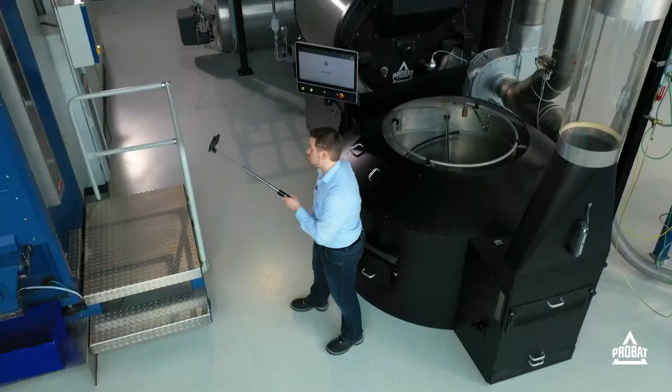How do we at PROBAT see these important topics, and what are we currently working on? Come, I'll take you with me on this journey, and first I'll visit my colleague Sebastian Fichthorn, Head of Technical Department for IT and Automation. He's waiting for me in our amazing control room, sometimes I call it our Starship Enterprise. Before I forget, you'll have the chance to ask questions during the closing Q&A session.

Okay, now the steps. Sometimes every step feels very exhausting. We hope we generate much interest with the following solutions.

So that's him, here is my colleague Sebastian. Hi Sebastian, I hope everything's well prepared and running now. Yes, thank you, everything is running. Welcome to our demo center here at PROBAT in Emmerich. My name is Sebastian and I'm head of the Software Engineering Department here at PROBAT. Today I welcome you to our demo center, our control room, where we can control the whole machinery downstairs from our pilot factory, and we can also run simulations here and do online trainings.

Today I'd like to introduce our new software solution, our Pilot 2020, which I developed over the last year together with my team. We also changed a lot hardware-wise, equipping every motor with a VFD, giving us more flexibility for recipe development and energy saving. But today we'd like to focus on the software part.

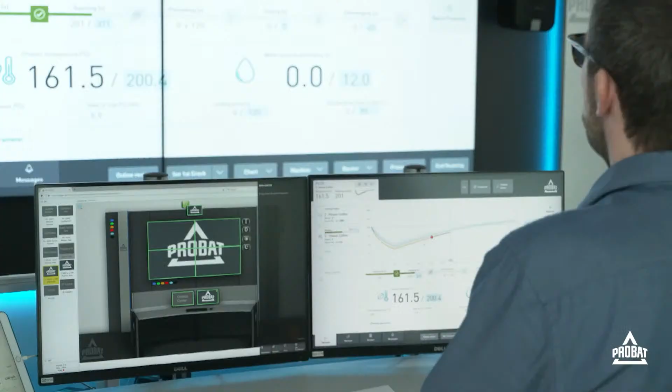So what do you see here on the screen? This is our main overview screen with all the stages. On the left you see every stage of this roaster, and in the center of the screen we have our current product curve, running against a target curve. We directly visualize if you're running out of target by a color change of this product curve. This is a simulation, so we only want to show how this looks. Below the curve we have our progress bar, showing at which stage your roast currently is, and below that we've allocated the main KPIs of your roast, like product temperature, water quenching amount, or cooling and discharging.

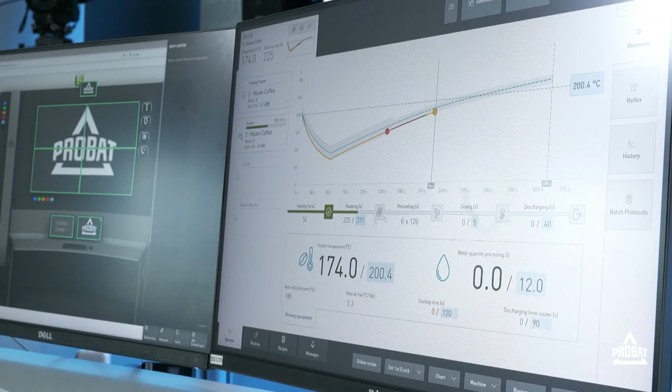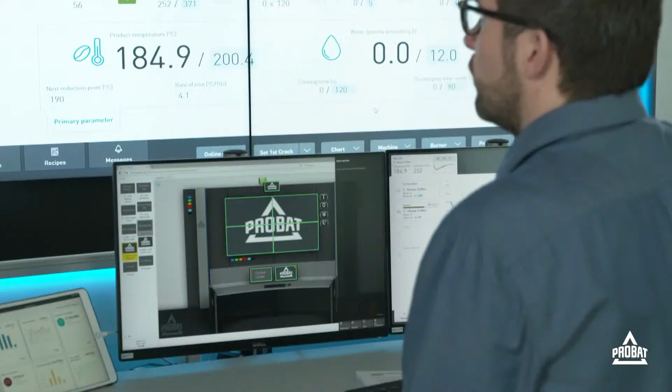You may have noticed that we don't have an alarm table displayed all the time here. Instead we have a so-called toaster which flies in from the right corner to inform you there's maybe information for you, a warning, or even an alarm. You may all know that you often have to monitor different roasters, different machines, and quite a lot of other things to do, or you might even just be enjoying a good cup of coffee, and then you need immediate attention, or your machine needs immediate attention to solve an issue.

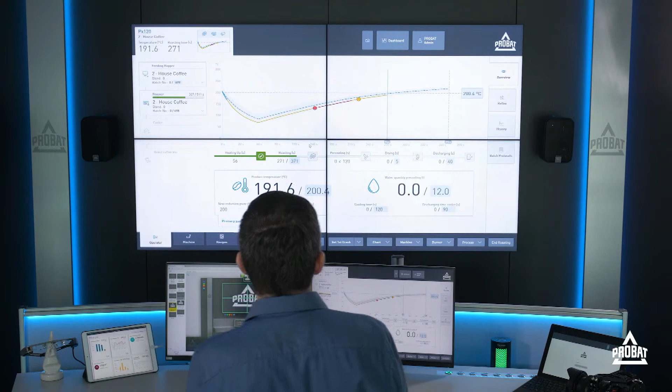Therefore, we have a solution, and we can communicate with all these kinds of modern control room equipment. I will now show you this when I'm triggering another alarm at a different machine.

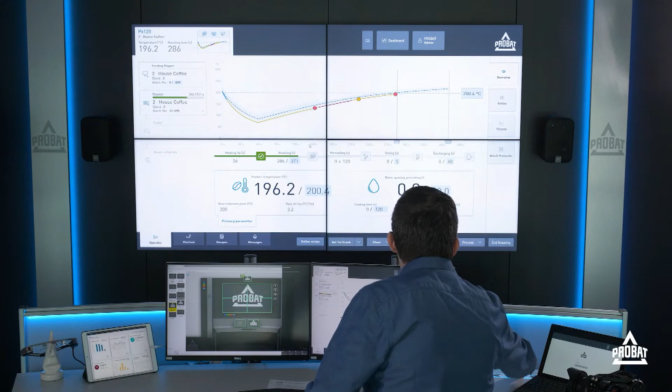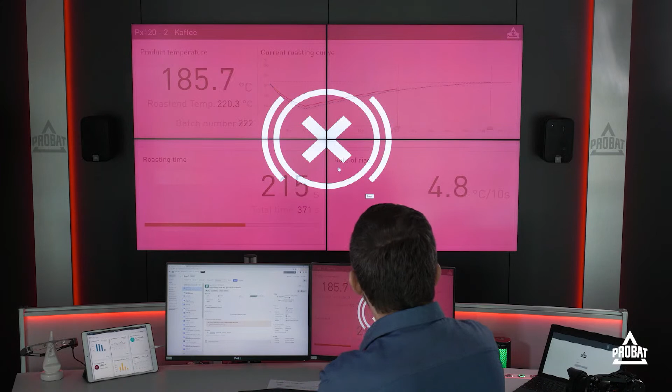What happens? You see, we switch the lights to red, and we play this sound via the speaker. Also, we change the content of the whole picture and display another machine on the big screen, as well as here below on my desk. Now I can click it and I land directly in the relevant page of our application, where I can take care of the issue.

But before I take care of this alarm, I would like to introduce our new message service and alarm management. We think it's very important to have the information you may need to solve an issue, or see how to solve it, directly at this alarm management system.

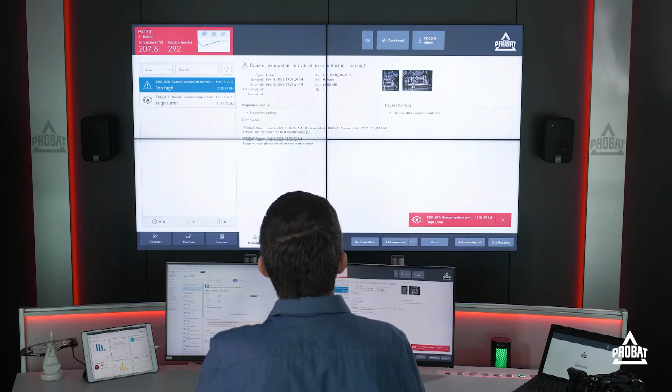Therefore you now have the possibility to attach images or little video clips or how-to videos directly to the specific alarm, and you also get a functionality to add comments for your colleagues directly to this alarm. That means if you're on the night shift and have no maintenance team available, you can leave a message for the morning shift: please, when the maintenance team arrives, check this issue, maybe change the sensor. This happens quite often. So you have some kind of knowledge base directly implemented in our new application.

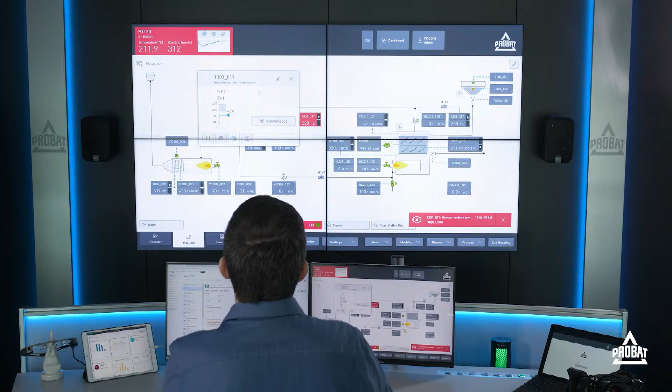But now I will take care of this alarm, and I will acknowledge this information, and I will also use this go-to-machine loop-in to acknowledge this so-called object alarm. We divide these alarms into object and process alarms, and these object alarms will always give you the loop-in to the specific and relevant device at our machine overview screen.

So you see, in between, when I solved the issue, the lights go back to the color from before, and I'm in a quiet and calm atmosphere again because the issue is solved. No immediate attention is necessary anymore, and I can do my other work again.

But before I switch back to the operator screen, because I'm now here at the machinery page, I would like to explain what you see here. Here you have an overview of the whole machine, so every piece of equipment, every sensor, every motor can be controlled via this page. We can open these faceplates, and then you get a quick overview of the condition of a motor.

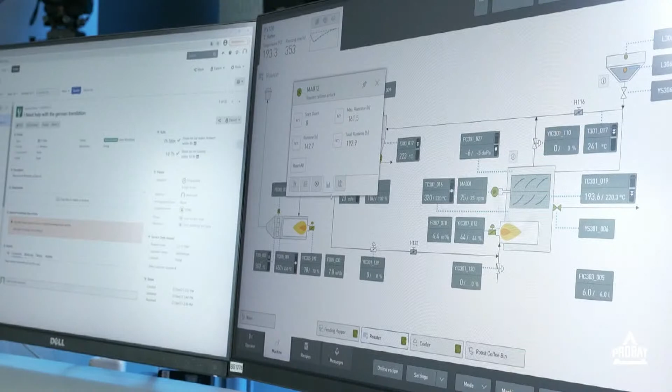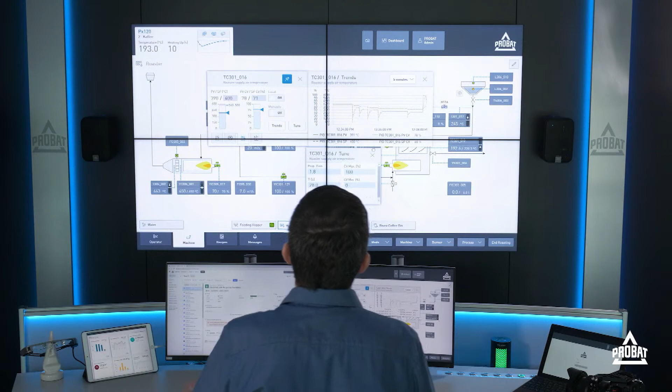For example, here some statistic data tells you how long it runs or how often it's switched on and off and so on. You can also see a graph here, up to 30 minutes, showing the last values of this motor. And if you have the authorization level, you can also tune your controllers here, get a trend of the controller, use the tune parameters, and work directly on these devices.

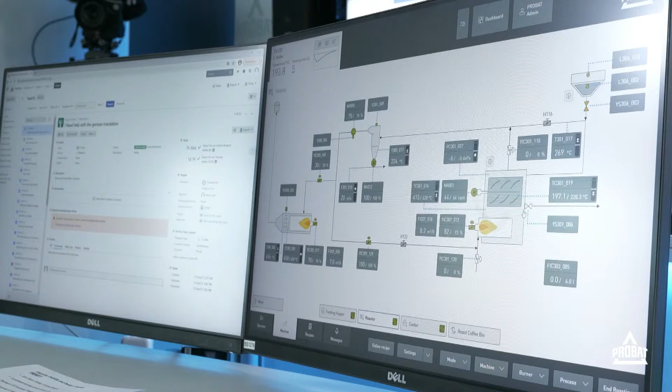Here at the bottom we also have some navigation, which means you can switch to the different locations of your roaster, because we think it's better to have less information and not such full screens, to get an overview and directly see the status of your machine. And now you see that we are just here at the coffee area in the roaster, which is even shown here by the icon at the bottom.

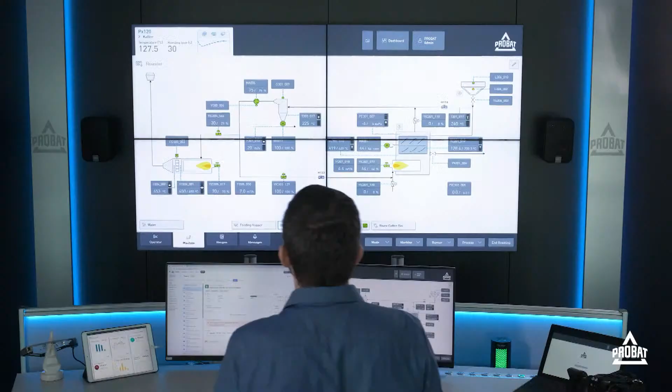We also did quite a lot in regards to data safety and security functionality, and therefore we have an inbuilt version control. So I will go back to the other screen again, and here, because I did not operate the system for a longer period of time, it switched to this screensaver mode, and you see the main KPIs displayed as a dashboard on your screen, so you can monitor the main KPIs even when you're not operating the system.

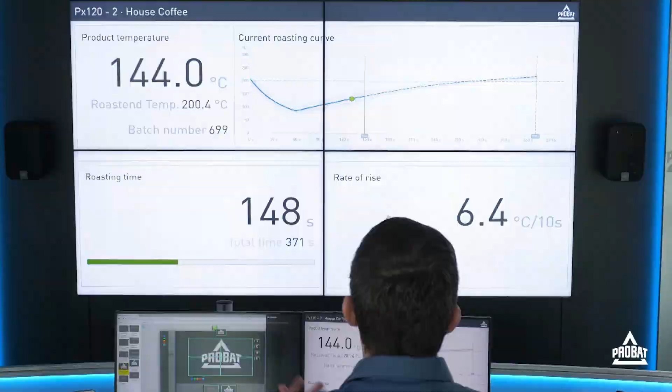That's, by the way, because it's here now at this machine. But when you interact with the application again, you will be back at the screen from before.

We focused also on data security and recovery systems, so we have an inbuilt version control. Every parameter you change, for example at a recipe or at your basic adjustment parameters from the machine, will get a new version if you change something, and then you can go back to one of the prior versions if the result wasn't as expected, and start new from that base. So it's easy to switch to the latest version or to a version before and start from there again.

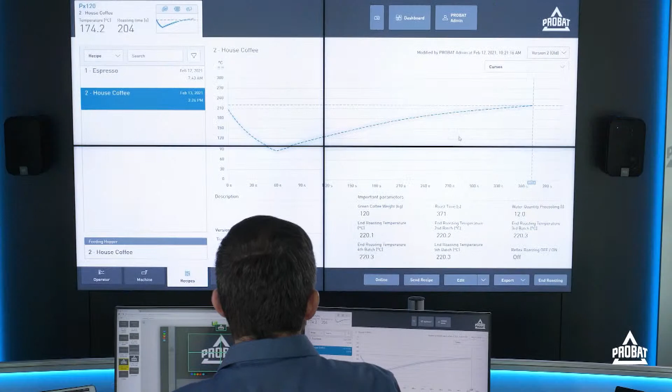We also have a lot of export functionality, which means you can export your data, print the data and share it with other colleagues and departments. We also have the possibility to provide a backup server, which is a redundant server to your main server. If you have issues at your main server, we will switch to the backup server with no loss of data and no shutdown from your machine, and then you can work with the backup server as the main server in that case.

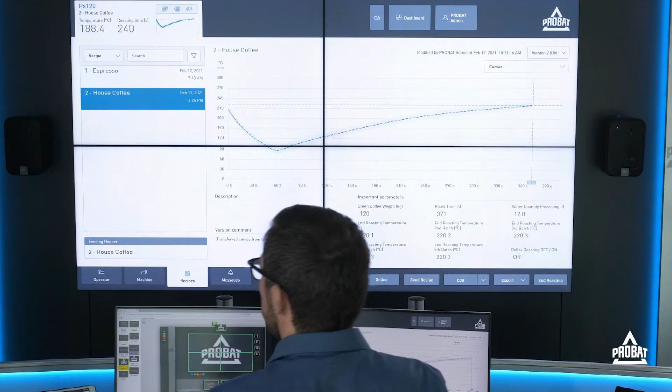One other very nice feature I would like to introduce is our new historian. You see here on the screen a table of every single value we get out of the PLC - we subscribe to these tags from the PLC and store it in this data logger. I think you would agree that with all these curves in that view, it doesn't really make sense because you cannot read it.

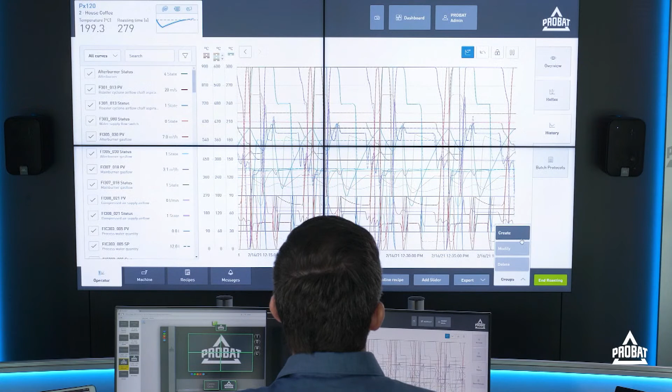Therefore we have the possibility to create groups and give them a name. You can select all the curves you would like to display and save it, which will reduce the list because you can then select this set, for example, or one of those predefined setups coming from us directly, and then do your analysis.

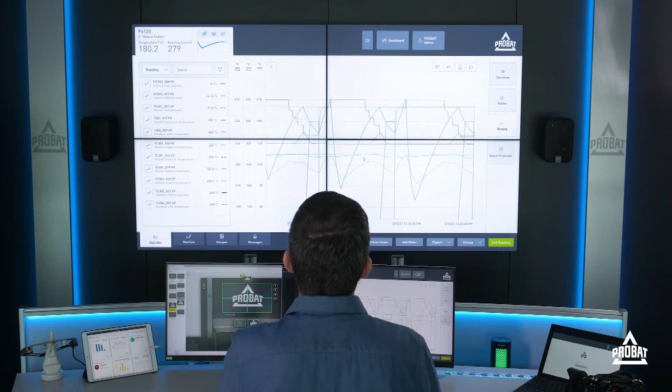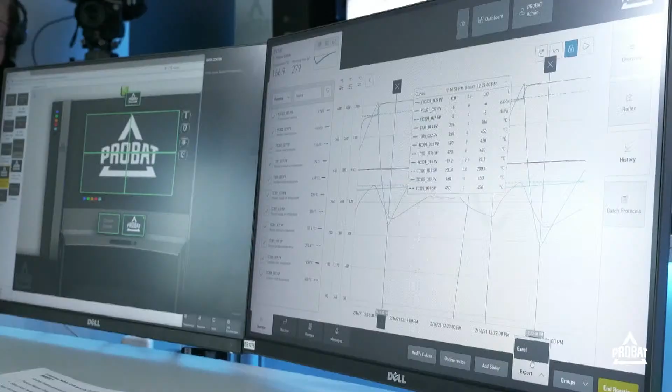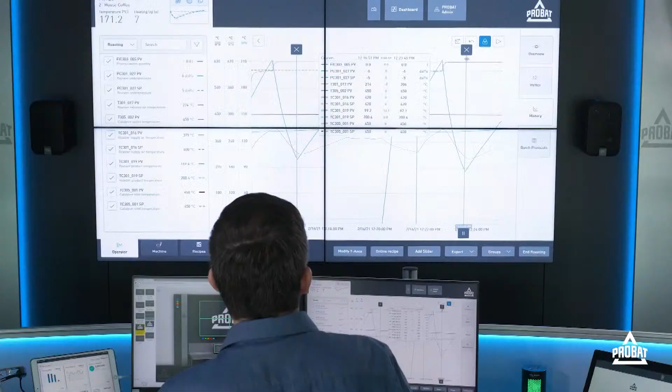Then you can also export it to Excel and share it with your maintenance team, or share it with PROBAT, and in the future you can attach this directly to our new service desk ticket system. Then we can analyze it directly in our office and come back with a solution, or even go online remote and solve the issue together with you.

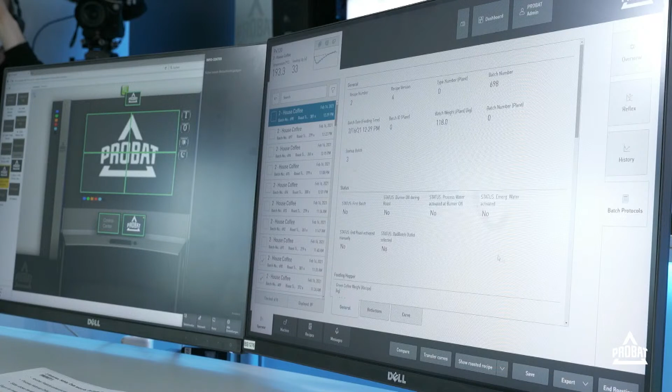One other feature I would present is this batch protocol. This is a list of all batches you have roasted on your machine over time, and you can select a predefined time, the week or whatever, or a defined time frame, and then do your analysis about your batch.

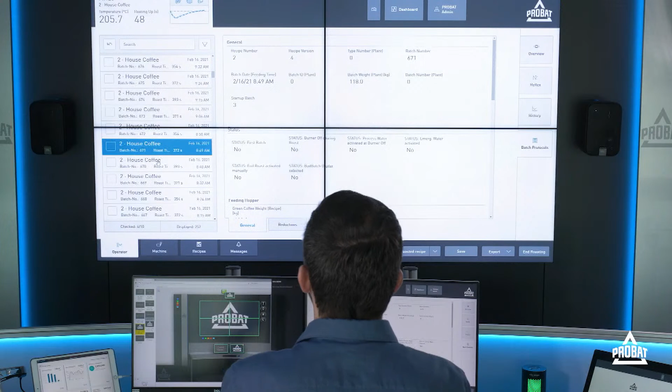Every parameter we get out of the process will be stored in this batch report, and you can see it here. Also, if we have an online moisture or online color system installed after your roaster, we will link the data we get from them directly to the corresponding batch. Also, if we have an interface to the shrinkage scale behind the roaster, we will have this value here in your batch report too - one centralized station where you can store all the data relevant for your product.

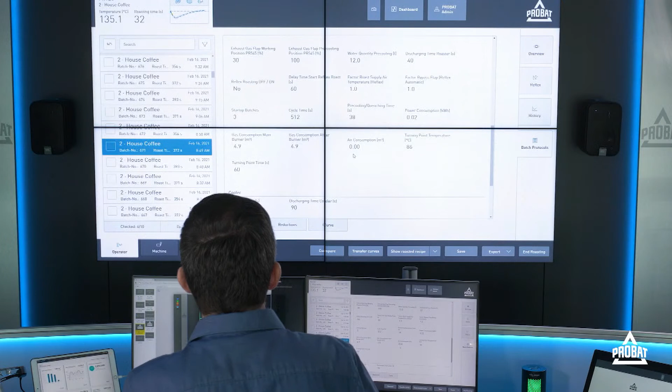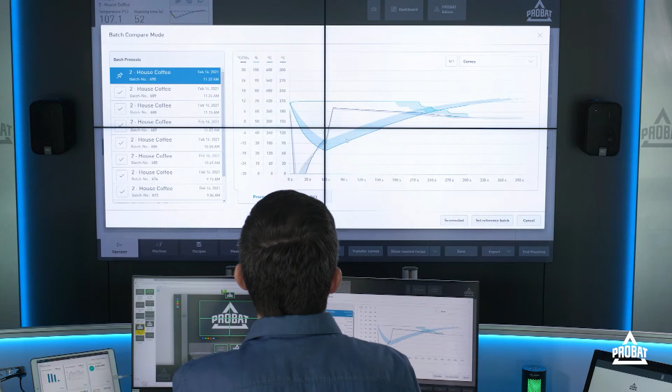If you would like to do a quality analysis or something else, you can select up to 10 batches, which you might have seen yesterday at the session from Ilvana and Daniel already, and make a comparison between different batches.

If you have also added some laboratory values or online measured quality checks, you can see in the laboratory tab the trend of these values, and you see directly if you're running out of the specification or if you are within your specification and everything is fine.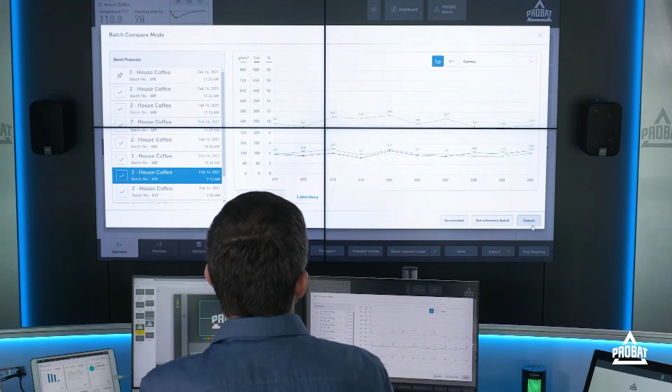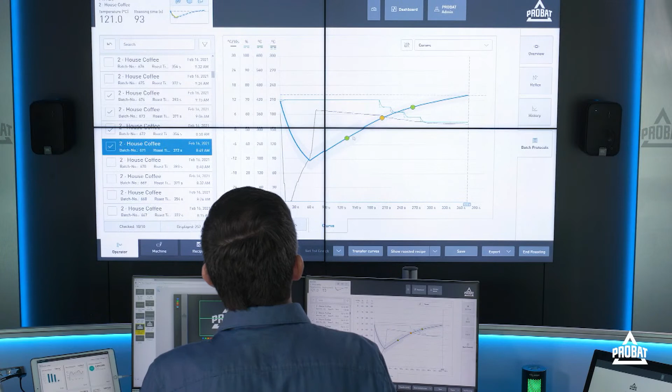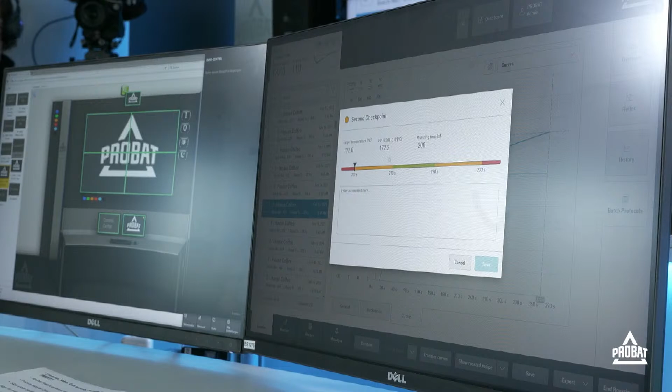One additional thing we add for quality control purposes is that you can add up to 5 quality checkpoints. These dots on the line check if you reach a certain temperature in a certain time period. In this example, the target temperature was 172, and the time period to reach it was 210 to 220, but we reached it at 200. So we were not within specification, just on the border between the inner and outer limits. But I can say it's okay anyhow, save it, and all this information will be stored in the batch report.

What next? We would now show you how easy it is to run our application on different devices, because we are independent of which operating system we are running. I would like to hand over to Sebastian again. He is now in our cupping lab together with Ilvana, and I guess they are just checking the roast from yesterday. So please, Sebastian.

Hello, I'm back again, now more or less in the older world. You heard it already, Ilvana is doing her cupping. How was the roasting yesterday? Very good, of course. Sounds perfect.

At the moment, mostly quality data and cupping data are documented on paper or in local Excel files, so this handling will change now. With our web-based software solutions, we are also able to operate with smart devices like this tablet. Ilvana and our customers will have the possibility to directly enter measured values into this tablet, independent of operating systems and locations. So all data will be transparent and centrally documented. Data acquisition, transparency and analytics are becoming increasingly important, so that optimization potentials can also be enabled.

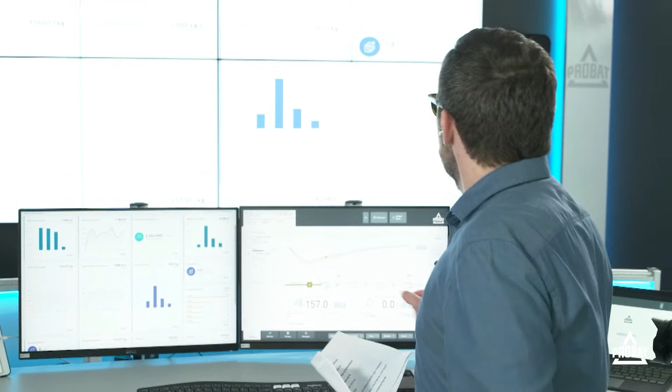Unfortunately he cannot be with us here in Emmerich because of the travel restrictions of the COVID-19 pandemic. But I set up a conference with him, and I will now switch and welcome Kersten to our control room. Welcome, Kersten, please tell us more about you, about your team, and about Fabscale.

Thank you very much, Sebastian. I would have loved to be there, but in this case, welcome at the Fabscale headquarters in Innsbruck. My name is Kersten, I'm the CEO of Fabscale, and I'd like to take the chance to tell you a little bit more about who we are and what we do.

And what these cloud solutions are that Sebastian just mentioned. Fabscale is a young company, not even 2 years old, and we are a joint venture of two major players of the industry: PROBAT on one side, with its incredible experience building plants, roasters, and plant equipment, and Cropster on the other side, a leading cloud software company with a whole set of digital solutions for the coffee industry, although with a strong focus on the shop roaster segment.

Both companies recognize that compared to other industries, the coffee industry is not where it should be or could be in regards to smart technologies. There's a lot of useful data being generated, but not exploited at the moment. There are many reasons for that, but one is that there are many isolated solutions that are quite independent from each other, and quite complex to implement and merge.

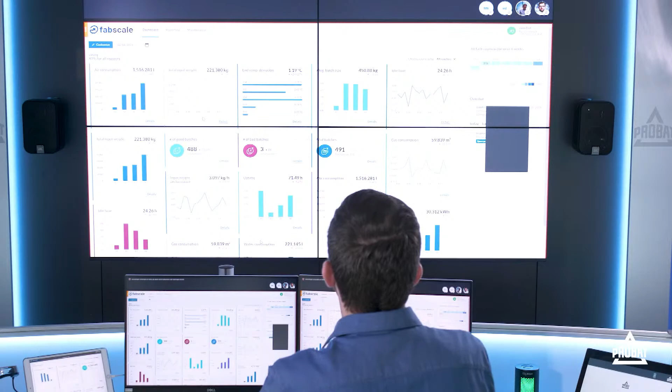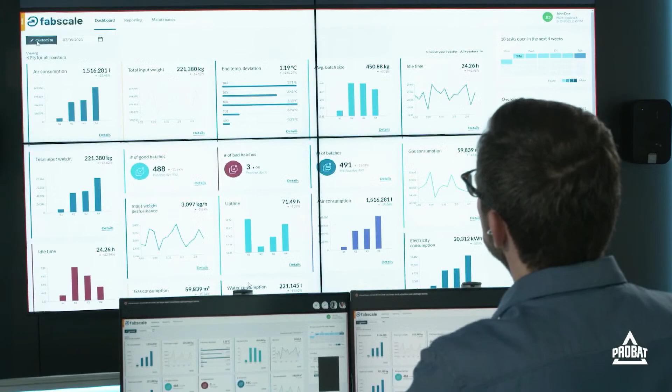What you can see here is already a whole set of KPIs coming from the roaster, from consumption data or weight data and so on. But what's interesting about this dashboard is everything is easily customizable. Every user has their own profile, and each user can set up their individual dashboard according to the information they need for their daily job. It's quite easy to add and remove KPIs.

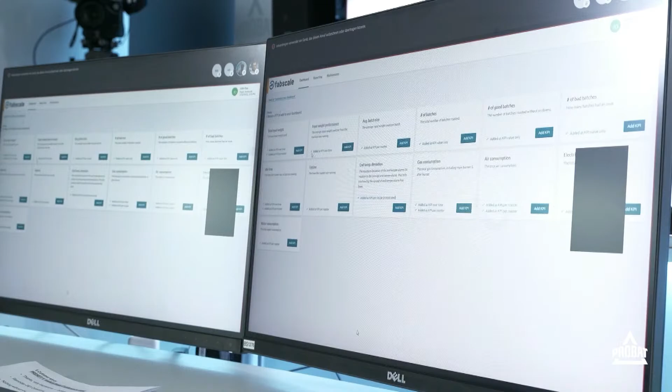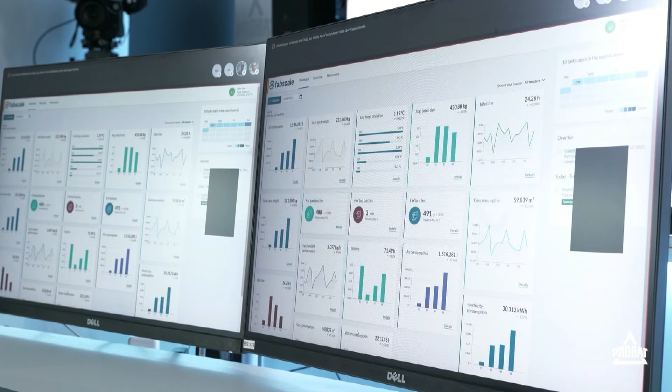Here you can see what has already been added and what not. It's quite easy to choose how you want to display your KPIs, and quite easy to sort them just by drag and drop. So you can really build the dashboard in a way that fits best your needs. You can choose the date you want displayed, and the more modules we add, the more information is going to be displayed on this dashboard.

Of course, we don't just have the live data or recent data, we also have historical data, which makes it really easy to report. You have the possibility to select date ranges, KPIs, which roasters you want displayed, and which recipes you want displayed. I have a template already for last week, and I'm able to display all the production data from last week with a simple click.

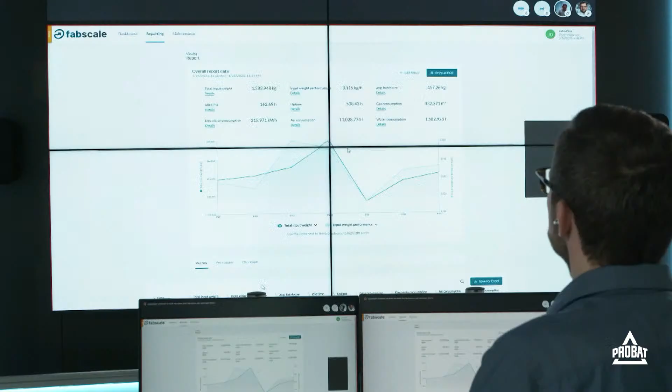I further have a lot of possibilities to have them displayed per day, per roaster, per recipe. I can compare two values on our graph at any time. And obviously I can print the data and save all the data to Excel.

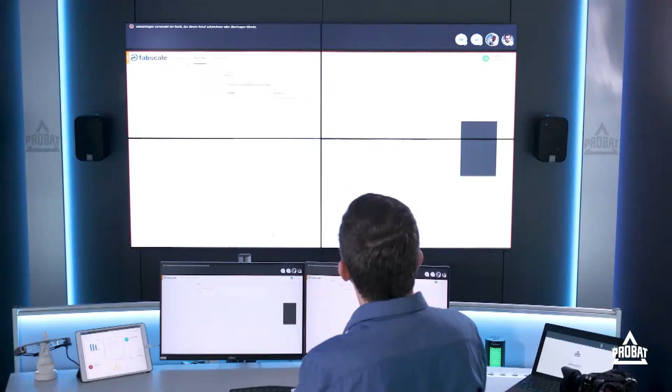Up here, we have a lot of space. This is already our maintenance module that we're going to release quite soon, and there's a lot of space for further modules coming soon. So as I said, it's going to be a whole set of modules and solutions that integrate into this dashboard.

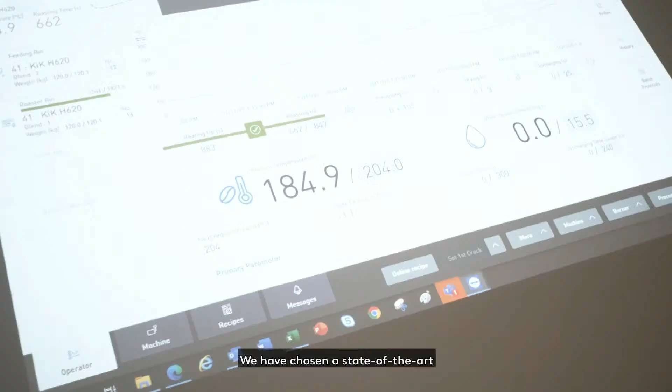Third, flexibility. We have chosen a state-of-the-art and reliable technique, operated by skilled and experienced co-workers. The equipment provides increased flexibility, a wider range of roasting profiles. It means we are able to offer you the coffee you want with high availability.

I'm really proud of the state-of-the-art roastery and really looking forward to the summer when it will be up and running.

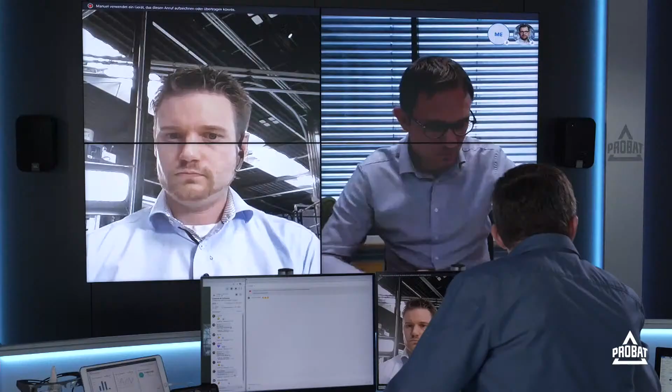And therefore I will switch to another setting again. Here you see that I have my primary roaster at this screen, and also another machine, a P60 in this case, and I can control and switch to that. If I have additional ones, I get a drop-down menu and can switch to other machines, and I directly see if one is not connected, or if another machine has an error, like here in this example. So it is easy to switch, and all roasters running with the Pilot 2020 can easily be controlled from one station and can be integrated.

Okay, then we received also a question about Fabscale, and this will now answer my colleague Christian. I have a question here about if Fabscale can be installed on site or if it's only cloud-based. So yes, Fabscale is cloud-based, obviously.

Can it be installed locally? No. The reason is quite simple. When we talk about these up-and-coming technologies like analytics, predictive analytics, IoT, or even artificial intelligence, they all rely on huge computing resources, which are almost impossible to provide outside of a cloud environment. Implementing this technology on site would require massive investment in hardware, IT resources, and at the same time would take away advantages like scalability. So I don't see much reason to install these kinds of technologies on site, and this is definitely not something we are going to provide. I hope I could answer your question. If not, please let us know.

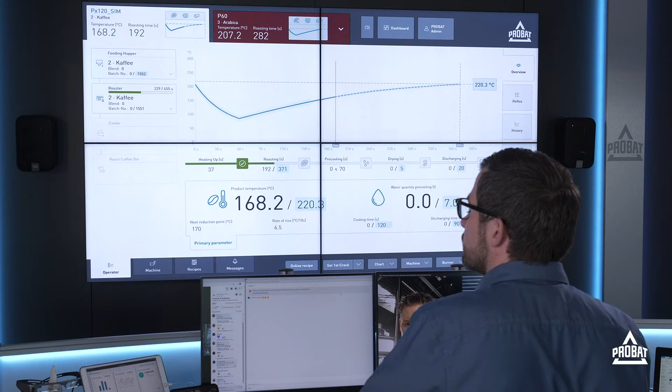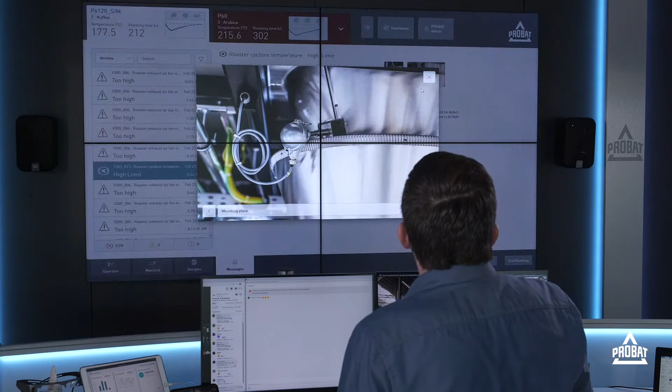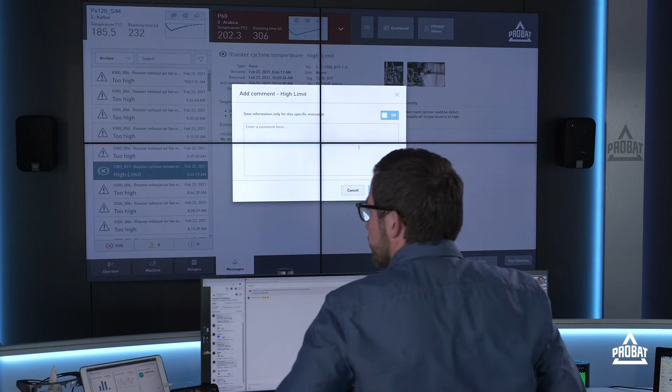Okay, thank you. For the next question, I will switch back shortly to the simulation application. There was a question yesterday about whether it is possible to attach videos or images. I mentioned it before, but maybe once again: if I go here to the alarm archive, you see the list of all the older alarms, and here you see that it is possible to attach images. It could also be a little video, and then you can click on the different pictures to have some kind of knowledge base for your troubleshooting. It's easy to attach this as well as the comments that were asked for. So here you can add the comments and put them to this specific alarm. That was also one of the questions.

And now I guess Christian has received another one. Yes, I have one more here. It's about how do you connect Fabscale to the plant. I'm not quite sure what exactly is meant with plant, so it could be two things. I don't know if the question meant how we get the production data from the plant, or if it's about how we connect the PLC, the plant software. At the moment, we don't connect the plant software yet. This is something we will do in the future. It's already on our roadmap, and we're already working on it together with our partner PROBAT.

For now, we get all the production data straight out of the roasters. Depending on the roaster type and age, we have several degrees of implementation or integration, and from there we can already get a lot of data regarding production from the plant as well. I hope this is what the question meant and that I could answer it. Otherwise, just send me an email and we can go more into detail. But thanks for the question.

Thank you, Christian. There was another question that came up yesterday, about whether it is possible to control remotely. Just to verify, like we demonstrated here in the session, it is possible to have exactly the same application running from a control room, from an operator station, and even at the machine panel. Only you have to have the emergency stop button at the operating station when you want to control the devices and motors, because of our safety strategy. That's the only difference between a client for some smart solutions or running it on a regular tablet for your laboratory analysis, like Sebastian showed you.